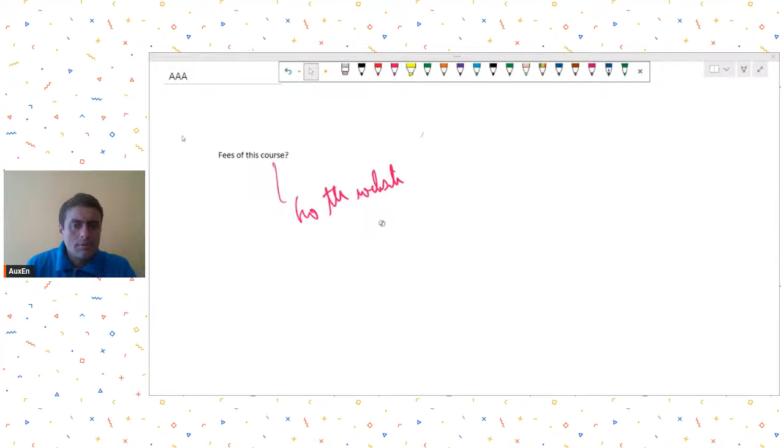Moving on, the next set of questions have been asked by Engineer Ishan Desai. He is a working professional from Goa, and he is asking these questions. I'll just put it up over here. And I think he had shared one image also on WhatsApp. Okay, he has put that in. So let me first take these queries.

What is the maximum span of a cantilever slab one can give for balcony in RCC? So there is no restriction as such on the span that you can go till. But then, if you could show the results of this case on ETABS or SAFE. No, so there has to be some specific case which I need to show you, so I'm not showing any case over here. But what is the maximum span? No restriction as such. It will depend on the system that you can come up with.

Okay. But if it's, let's say, a residential building, people will not be ready to do a lot of things for long span cantilevers. Otherwise, you may have to do some different structural system like Vierendeel girders or some 3D trusses. In residential commercial constructions, people won't be ready to invest so much on that. So I would say comfortably a maximum span of around 7 to 8 feet is more than enough in small residential commercial buildings.

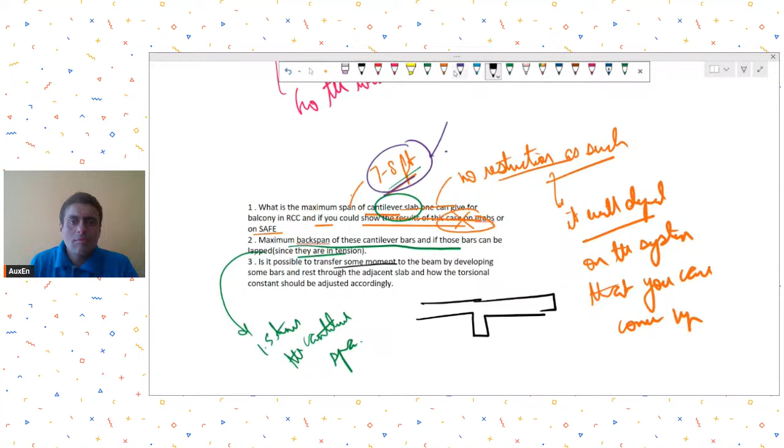Is it possible to transfer some moment to the beam by developing some bars and rest through the adjacent slab, and how is the torsional constant to be adjusted accordingly? No, just by developing bars, beams will not start taking moments. For example, I am showing you a cross sectional view; suppose this was a beam, and this was a slab.

And in plan view, this was something like this, let's say it is continuing over here. So in plan view, you had a beam at this location, and this was your cantilever slab, and this was your beam.

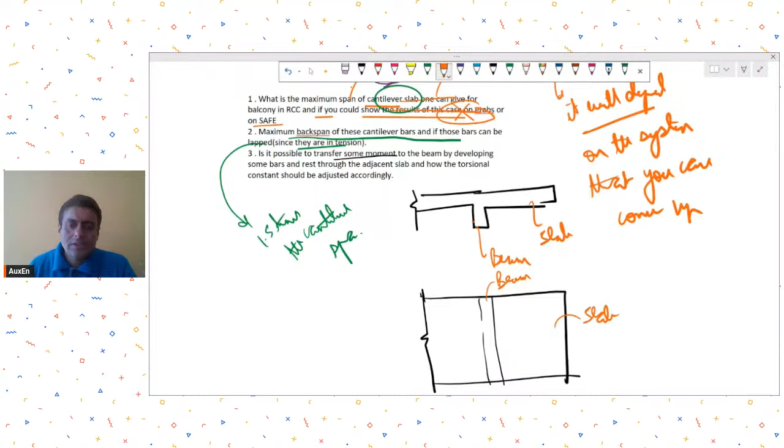So in this case also, this beam will have some torsion. That torsion will be to maintain the equilibrium. So there will be some torsion in the beam. Now just developing the bars and hoping that the loads will be relieved from the beam, it does not work

that way. It all depends on the stiffnesses, it all depends on the cantilever span, it depends on the torsional stiffness of this beam, it depends on the flexural stiffness of this slab. So just by developing bars, you cannot change the behavior. Please understand, the behavior depends on the rigidities and stiffnesses of these individual elements in the respective actions.

So torsional constant to be adjusted, I'm not sure what you mean by that, but please understand that developing bars carry no meaning. You have to understand the stiffnesses involved and how they are going to play out. Okay. Yes.

Okay, related question over here. Mr. Yogeshwar Rao is asking how to withstand 8-meter span cantilever beam without back anchoring. Why do you want a 8-meter cantilever beam? 8 meters is a lot. First of all, ask this question to yourself. And that too, you are saying without back anchoring.

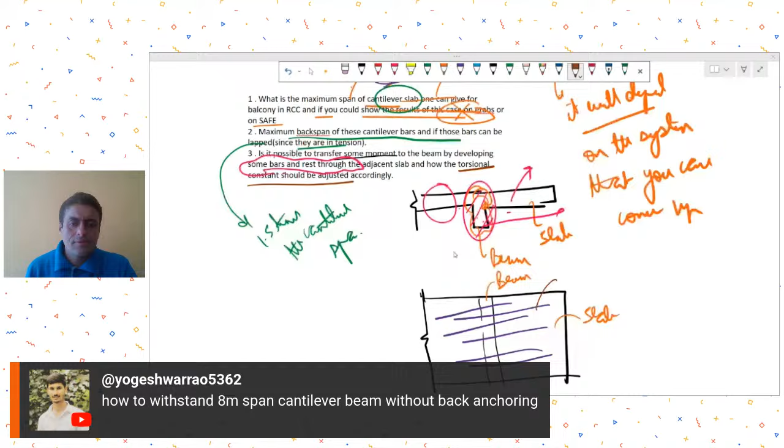So, in these cases, let's say if this was a column cross section and you are taking 8 meters out cantilever and it does not have any backspan. I am showing you a sectional view. So I don't see the reason. First of all, ask this reason to yourself, to the architect, why at all an 8-meter span is required.

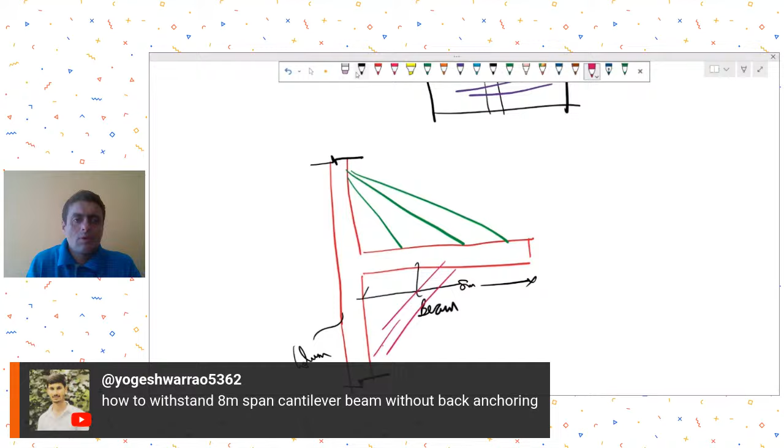If, let's say, usage wise it is required, just having a 8-meter span without backspan will not be stable enough. You will have to add other systems. For example, you may have to add wire ropes, or if possible, some knee braces, or you may have to develop some three-dimensional truss system where maybe another beam you take something like this, and then try to make something on this face in this view. So these types of systems will be required.

Just a normal beam 8 meters without backspan, you will not be able to stabilize it, and I will not recommend you to do that unless you add other systems like, as I just explained, some wire ropes or some knee braces, etc. Okay.

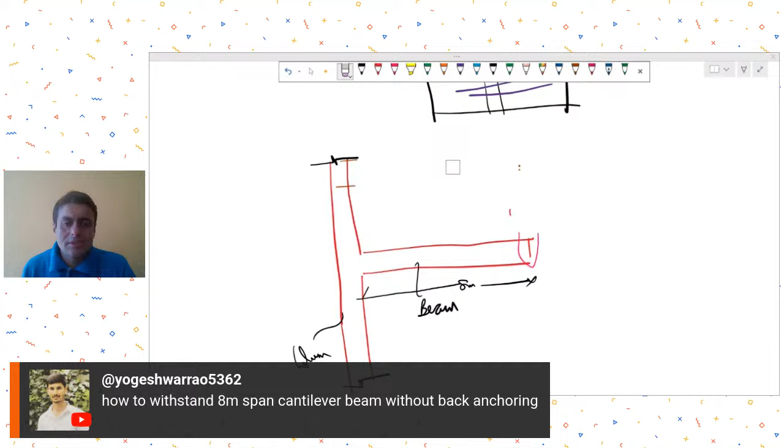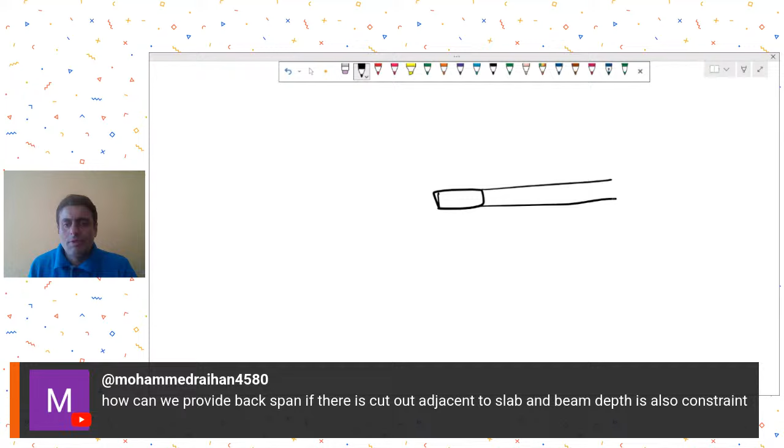Mr. Mohammed Raihan is asking a related question. How can we provide backspan if there is cutout adjacent to slab and beam depth is also constrained? Yeah, so see, these are specific problems. Then you will have to work your way around with your architect or with whoever is looking after the project. So if this was the beam, I'm showing you the plan view, and suppose this is all slab.

So specific cases you have to come up with specific solutions. An answer to every specific case may not be possible without knowing all the facts of the matter. But what I can understand is he's saying there is, let's say, a cutout over here in plan. So now you cannot have this beam continued at the back because there is a cutout. So in this case, what to do?

So it will depend, as I said, these are specific problems, specific doubts. These will require specific solutions as per your structural configuration, and then you can come up with solutions whether to shift this duct or maybe add another beam adjacent to this beam, whatever. So unless we have all the facts, specific doubts are difficult to answer. Okay.

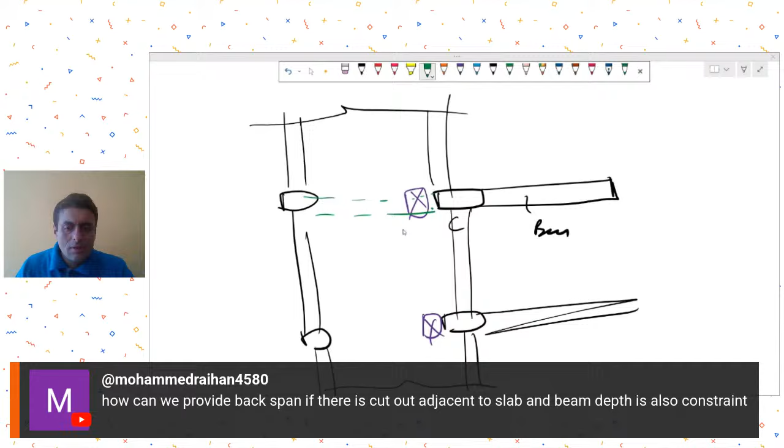Then the next query is from Mr. Ishan Desai, who has put another query. Let me just paste it over here and try to make sense of it. So he has put this query and then he has put this image, and I think he has shared one more image.

"The column forces are transferred as point loads in ETABS, and we try to convert it into shell forces by assigning stiff to those slab members around those points and the forces which we import to the SAFE file. But the stresses ultimately are being developed around those points in SAFE, which would not be a correct distribution of forces, I think."

I'm not sure what he wants to say, and whether it's a question or a query. So I'll skip this because I have not fully understood what he wants to ask. Then moving on, just a minute.

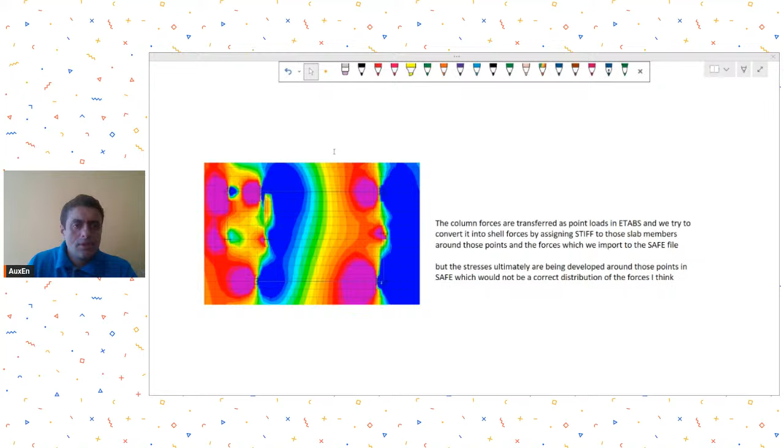Moving on to the next question. This query is from Engineer Rohit Dogra, who is from Himachal Pradesh and is a working professional. He is asking a query that many people have, and we've tried to explain this a couple of times earlier also.

He is asking: in my ETABS model, I have a structural wall and a column system resisting lateral loads together. I want to transfer about 25% of the total base shear to the column and the remaining 75% to the walls. This is the requirement given in ASCE 7-22 for dual systems.

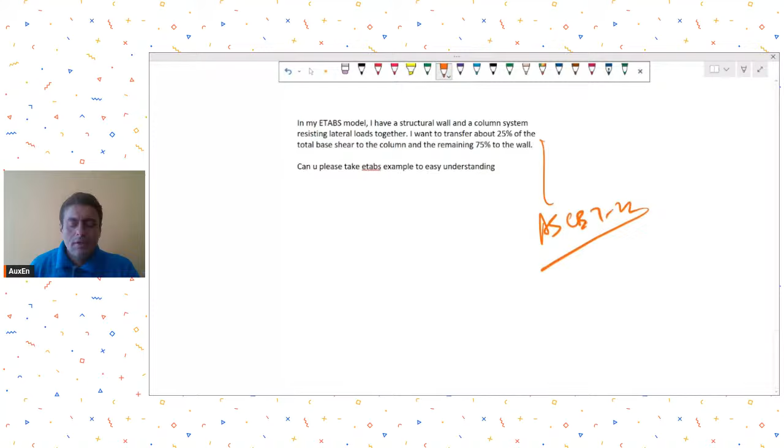In ASCE 7-22 for dual systems, if you go to chapter 12, they have given this requirement for the perimeter frame. So let's say if you are going for a dual system, which is special moment frame plus shear wall, the perimeter SMRF system has to take at least 25% of the total earthquake load. Understood?

That is the requirement given in the code—at least 25% of the total earthquake loads. I don't think the language says 25% of the base shear; it says 25% of the earthquake load. There's a difference between those two.

So let me just see first the language of ASCE 7. This requirement is also given in the IS 16700-2017 code, where they say something like this—25% criteria in well distributed shear wall systems. So how to go about this is the question asked. Let me just see what is the requirement given. Yeah, so it's not base shear.

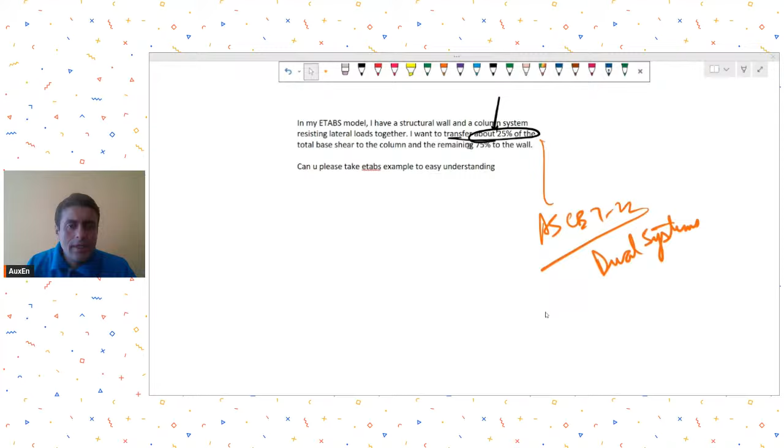Let's say I'm taking a screenshot from ASCE 7. It says: dual system with SMRFs capable of resisting at least 25% of prescribed seismic forces. There's a difference between resisting seismic forces and resisting base shears. So now how to go about it is the query.

Let me also have a look at the screenshot of this. Just a minute—screenshot from IS 16700, and then we shall discuss.

Anyone in the live audience who has this query as well, or anyone who does this as per their own way? Yes, please. Anyone who has had this query, or anyone who has been taking care of this provision through some procedure that they have developed? Just a minute, I'm just...

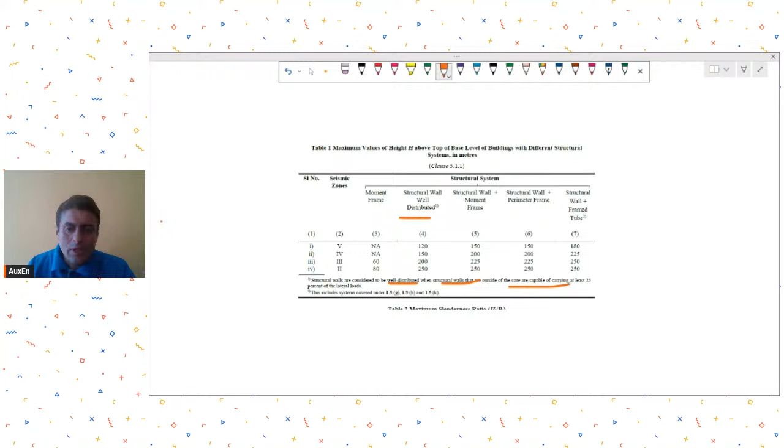This is a screenshot from IS 16700. It says structural walls well distributed—structural walls are considered to be well distributed when structural walls that are outside the core are capable of carrying at least 25% of the lateral loads. Again, it's not base shear, it is lateral loads. All right, so let us see how you can mathematically try and do this.

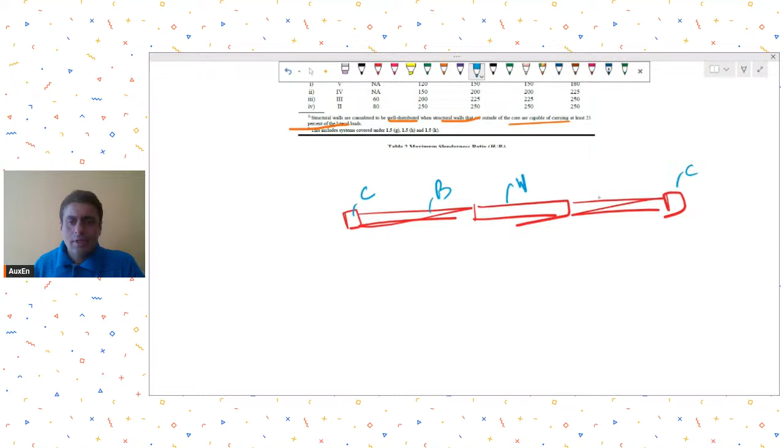I have explained this many times before also, let me try to explain once again. Suppose I had a simple frame—this was my wall, I'm showing you the plan view. This is my wall, these are columns, and this is my beam. In elevation, it looks something like this: this is my column, then I will have a beam, then this is my RCC wall, again beam.

Now what you need to understand is that there is some lateral force acting. This lateral force will have two effects. One will be that it will cause some shears—let's say this is V1, V2, V3. So first just see, and this is easier to see, that you just sum up the shears and try to get a sense of what is happening.

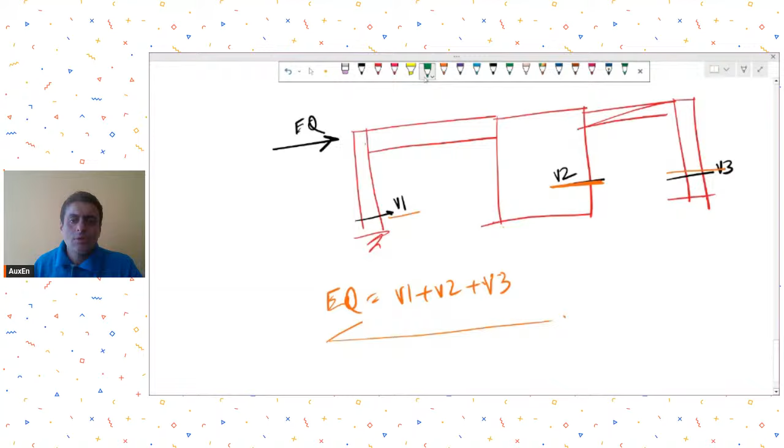If you do this, you will find that the total summation of shear forces developed will be equal to your external force. Now if I were to ask you how much shear the wall is taking, what percentage, and what percentage column C1 is taking, how would you find it out? It's quite easy: the percentage of shear the wall is resisting will be equal to V2 upon V1 plus V2 plus V3, or V2 upon the total lateral force. This gives you the percentage of shear resisted by walls.

Now this does depend on the stiffness. So you will see in such cases that the walls will be taking the maximum shears. Columns will not be taking shears as high as the wall, because it depends all on the stiffnesses. Understood? But there is one more effect of the EQ force, and that will be the overturning moments.

Now, how are the overturning moments resisted? Understand that the overturning moment will be resisted by, let's say, development of some moments, something like this.

Plus, there will be axial tension compression couples also. So let's say here there is some axial tension compression couple, and it is compressive in this region. This distance is x1, this distance is x2, and this height is h.

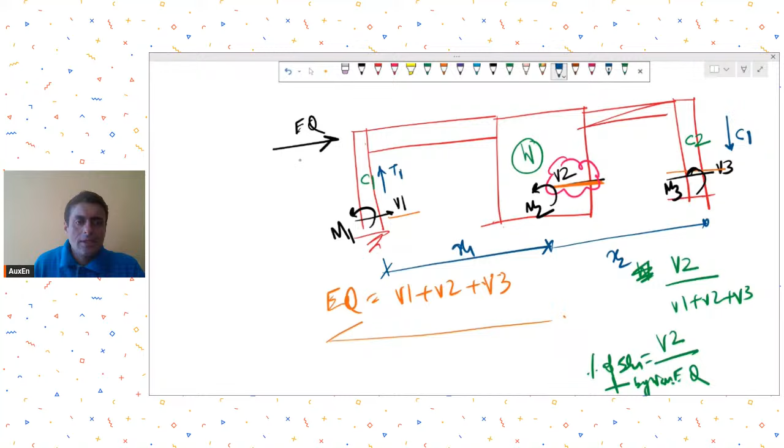So now how will the overturning moment be taken? You will say EQ into H. This is the overturning moment developed.

This will be equal to M1 plus M2 plus M3 plus T1 into X1 plus X2. Or instead of T1 into X1 plus X2, you can also write C1 into X1 plus X2, because T1 and C1 will be numerically equal.

Is this clear? So now if I were to ask you what percentage of overturning moment is being resisted by wall W, what will you say? You will say that the percentage of moment resisted by wall W is M2 upon EQ into H.

Or if I were to ask you what percentage of moment these two columns are resisting, then you would say the percentage of moment these two columns are resisting is M1 plus M3 plus T1 into X1 plus X2, divided by the total overturning moment.

So this will be the percentage of moment resisted by columns. This will be the percentage of moment resisted by the walls.

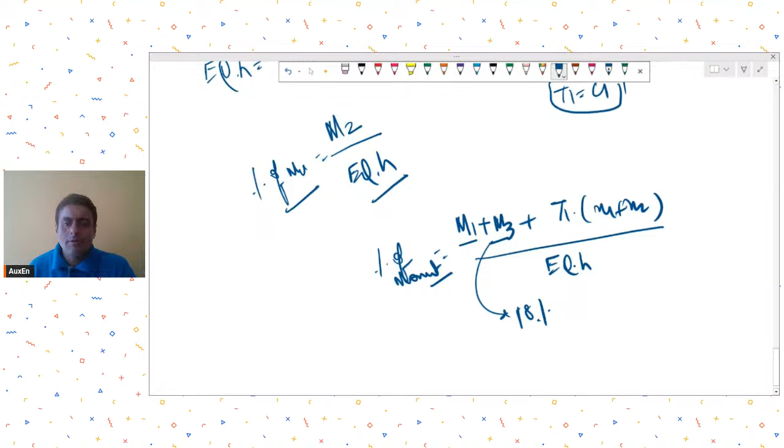Suppose you did the calculation, and just for example this came out to be 18%. How? Because you just summed up these moments, you did this divided by the total moment. So it is coming out to be 18%.

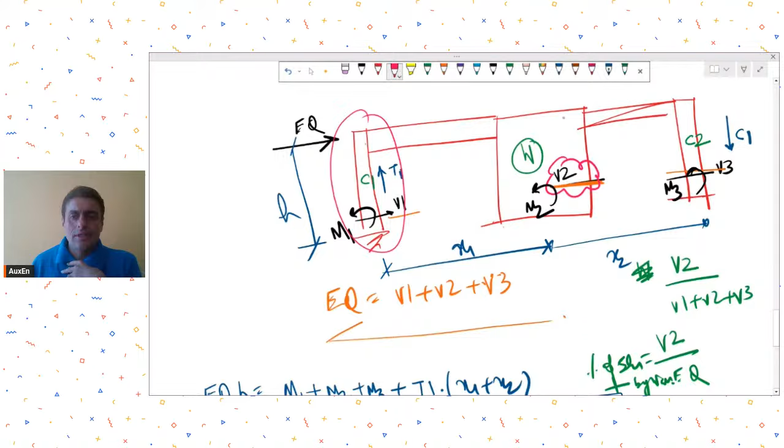Now, as per your clause, in this case the well-distributed structural walls have to take 25%. In dual systems, the moment frame has to take 25%. Just take whatever - in this case, let's say the columns were part of a dual system. They needed to take 25%. And right now they are taking 18%.

So now how to ensure that they are able to take 25%? That is the question. Anyone with any thoughts over here?

Is this clear what I just said? This is the way you find out the percentage, approximate percentage of moment getting resisted. Because you must understand that earthquake forces or lateral forces will have two outcomes - one will be the shears that they create, and one will be the overturning moment.

Shears, it's very easy - shears mostly depend on the cross sectional area and stiffness, so that will not give you the correct picture. So it is always better to find out the overturning moment in this way, and then try and see what percentage are being taken by whom.

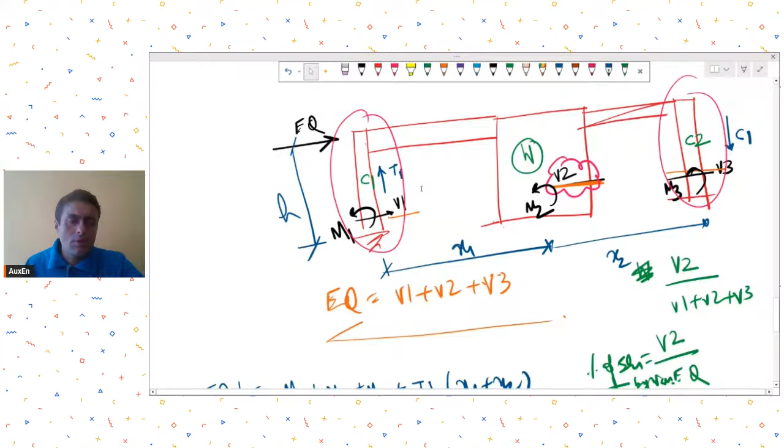Now let's say if they were taking around 18%, you wanted to have around 25%. So a quick jugaad way of doing this can be - some people suggest to apply modifiers. You save your model under a new name, and then apply modifiers in such a manner that the moments flowing to the columns increase from 18 to 25. That can be one way, but then it means you need to apply modifiers and do all those things.

So instead of that, a simpler way can be that you just define a new load case in ETABS. Let's call it EQ1. Define a new load case, let's call it EQ1. And in EQ1, how do you define it?

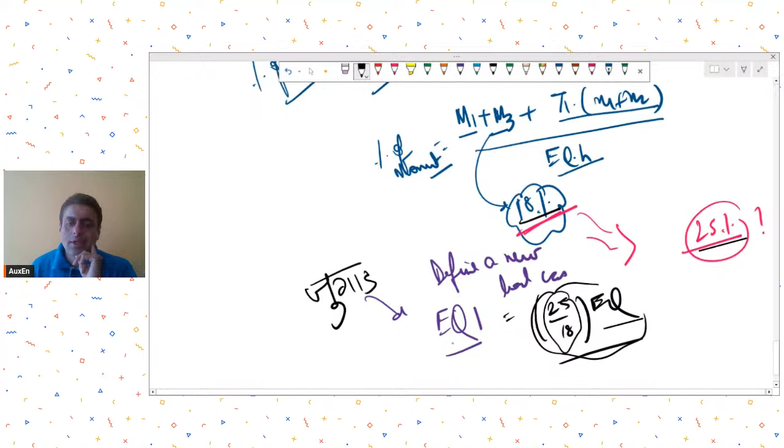So approximately 25 upon 18 times of EQ. Understood? So for your original EQ force, it was taking 18%. You want your system to be designed for, let's say, 25% for the columns alone. So you can use this as a multiplier, multiply it to EQ, create a new load case, and then use this load case in load combinations for design of the columns and beams, or the moment frame.

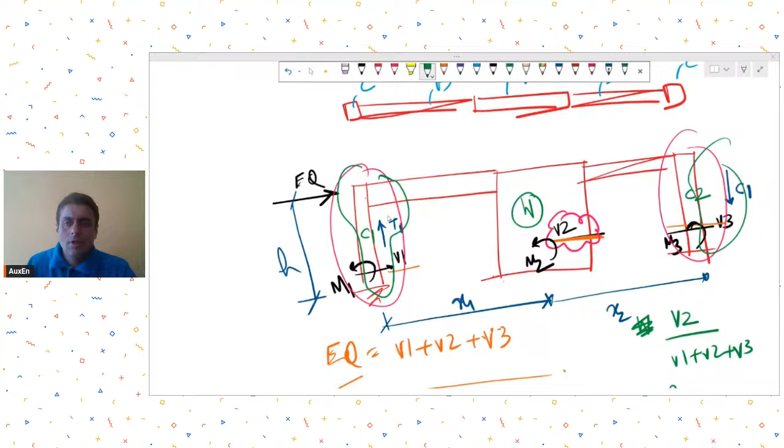So this case I took assuming that the external columns had to take 25%. You may have a case where the well distributed shear wall has to take 25%. Whatever is your criteria, in a similar manner you can do a quick jugaad. Is this clear? So this is one of the easier ways to handle this 25% criteria for dual systems or for well distributed shear walls.

So you find out the percentage and see approximately how much percentage is being resisted. Then introduce a new load case with this factor multiplied to your original lateral loads. You can use those load combinations only for the 25% criteria, for members which need to satisfy the 25% criteria, and design it accordingly. This can be one of the ways to do it.

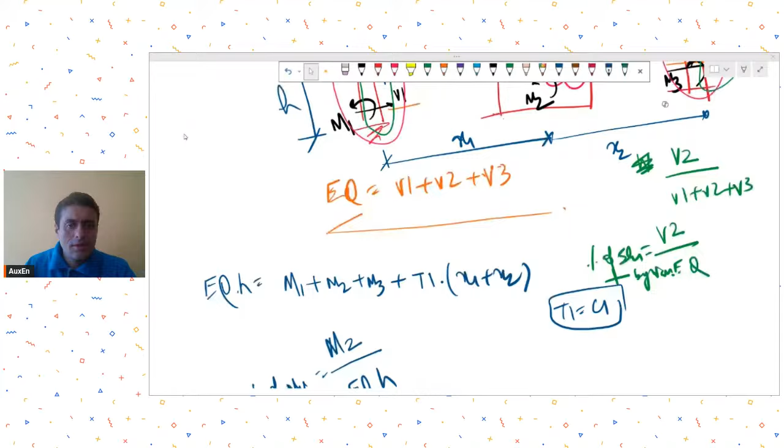Let us take the next query. It is from Dr. Harish BA, who is a participant in our liquid retaining structures course. Let me explain what he's asking very quickly.

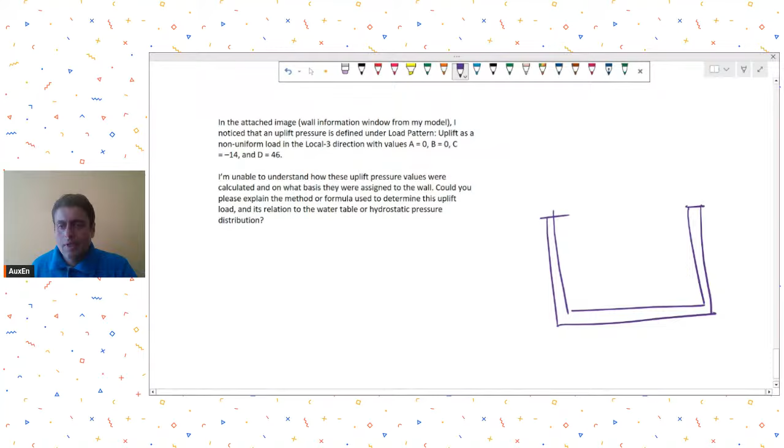Let's say this is a water tank sectional view and it is underground, and this is the NGL, ground level. There is presence of water, and let's say the water table is still here. There is water inside the tank since it's a water tank, and presence of water table outside. So now what will happen due to this water table?

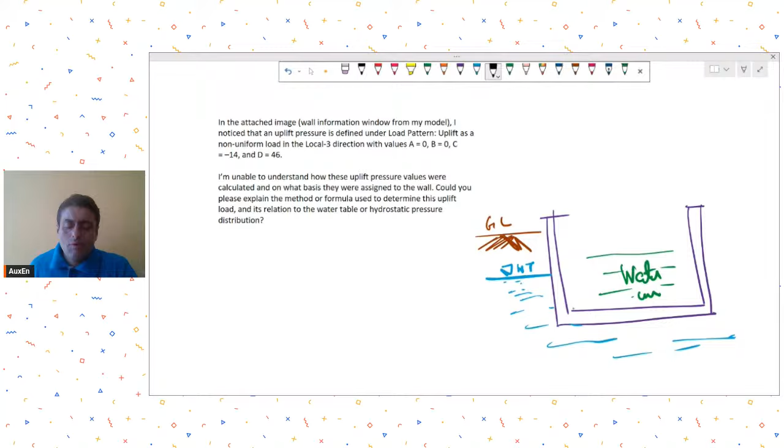This will first create an uplift on the raft. How will you calculate this uplift? Let's say the depth of the tank was 5 meters from the ground level, and the water table has risen up to 3 meters from the base. So what will be the uplift pressure acting on the tank? Naturally, uplift will equal gamma W into, as per the rules of buoyancy, 3 meters. This will act on the bottom of the tank or base of the raft.

Then, because of this water table present here, this portion of the soil is saturated, so there will also be lateral pressures due to this saturated or submerged soil. How do you do that calculation? As I had explained, the submerged soil condition exists below the water table. So up to this distance, you apply a triangular pressure due to soil. Let's say this is 2 meters, so this will be Ka gamma soil into 2 meters. Now below this, what will happen?

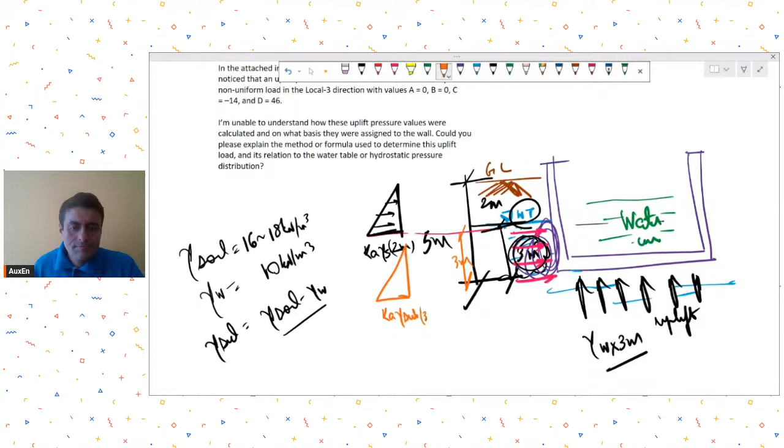This soil is submerged. Let's say gamma soil is around 16 to 18 kilonewton per meter cube density, and gamma water is around 10 kilonewton per meter cube. So gamma submerged is usually gamma soil minus gamma water. So how will we apply pressures over here? One component will be the submerged soil, which is Ka gamma submerged into this depth. To this you add the presence of water, which is gamma W into 3 meters. In this manner you can apply the loads.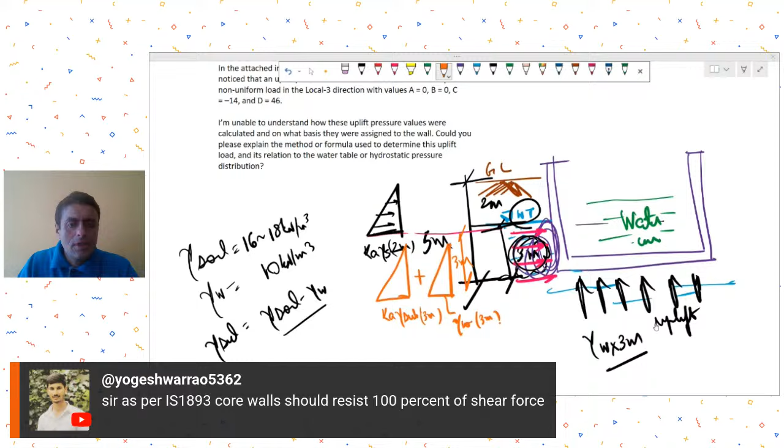Is this clear? So this was Dr. Harish BA's query. I think in an earlier question, a related query was, as per IS 1893, core walls should resist 100% of shear force. I am talking about dual systems -- what I explained in this was dual systems.

For dual systems, just have a look at ASCE 7-22 chapter 12, or have a look at IS 16700. Good. After this query, let's move ahead and see what else has been asked.

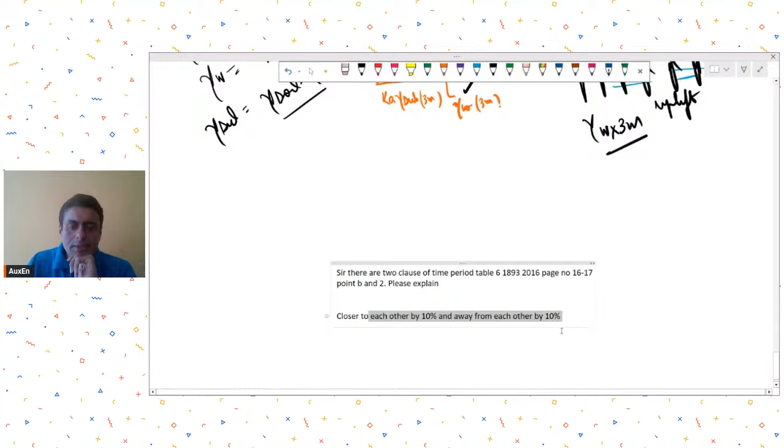Mr. Rohit Dogra is asking about two clauses for time period, page number 16, 17, point B, and the clause about time periods being closer to each other by 10% versus away from each other. Mr. Rohit, just refer to the Ask Us Anything session we conducted last week, or the week before. I'll share the link with you -- this same query has been explained there, so just go to that episode and have a look.

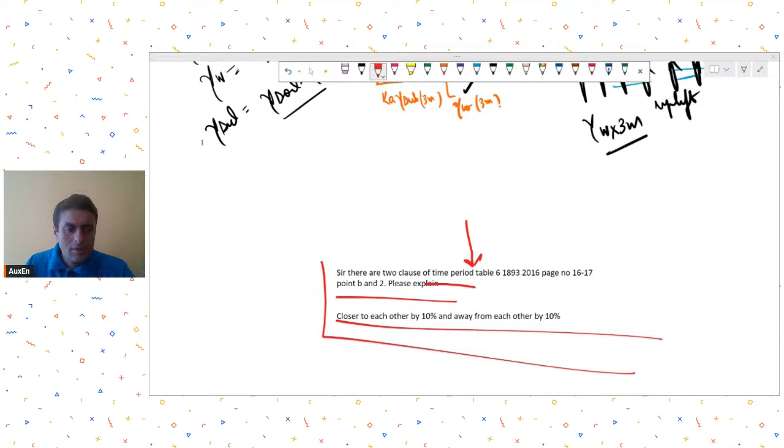Moving ahead, Engineer Abhijit Sathe is asking -- he is a working professional from Pune. What is the effect of column shortening, he is asking.

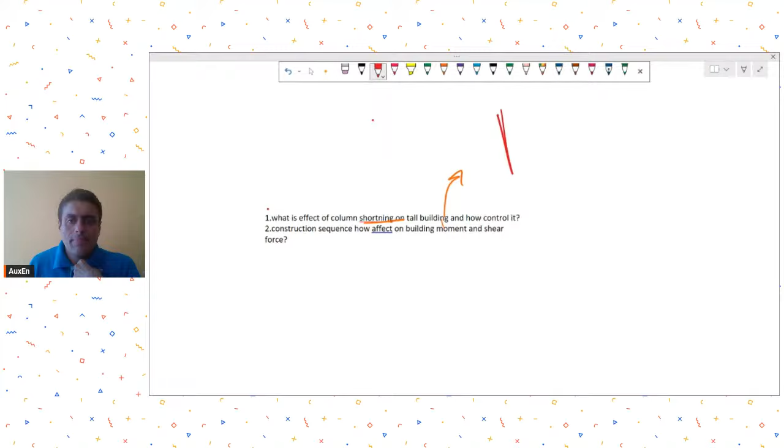See, columns, because they are axial members, and any axial member subjected to load will develop a strain. Any axial load naturally will create P by A stress, and if you divide it by E, it will naturally create strains, and any compressive strain will create shortening. That is natural -- you cannot control it, you cannot not have axial shortening. Understood?

It's not possible to not have axial shortening. It will always be there, because it's a property of the material to expand or contract when acted upon by loads. And it's not a rigid material. Please remember, both concrete and steel don't have infinite rigidity. So if they have a certain modulus of elasticity, there will be strains. Because of those strains, there will be shortening or elongation. So you cannot not have them, but yes, you can control it.

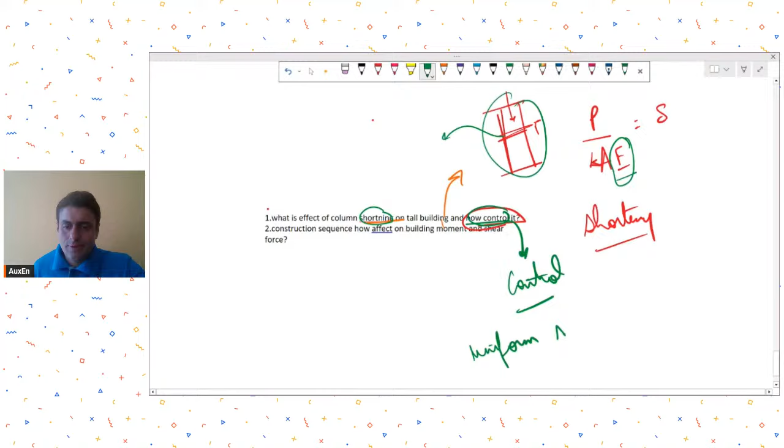By controlling it means, as far as possible, we generally try to have uniform shortenings. Okay. So uniform shortening means, let's say you have your tall building. Why we are talking more about this problem in tall buildings is because tall buildings will have large column axial loads which you may not get in normal buildings. And when there are large axial loads, you may get significant axial shortenings.

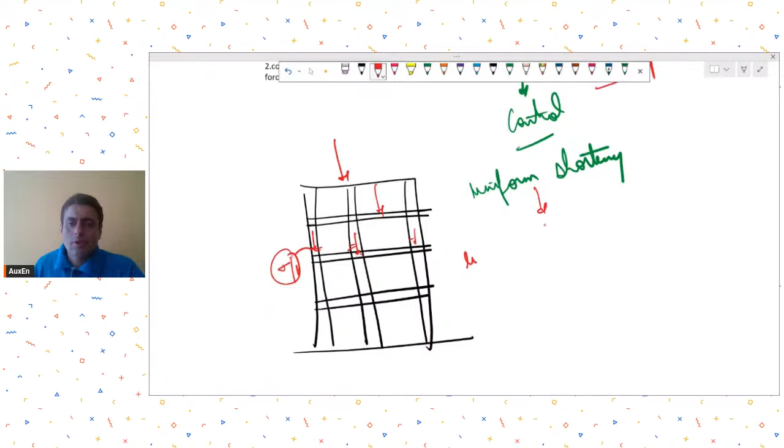Okay, so as long as the stresses developed in these columns are more or less uniform, the shortening will also be uniform. Understood? So uniform shortening is not a problem. Uniform shortening is not a problem. All right. When does it become a problem? When the axial shortening is non-uniform. What does non-uniform mean?

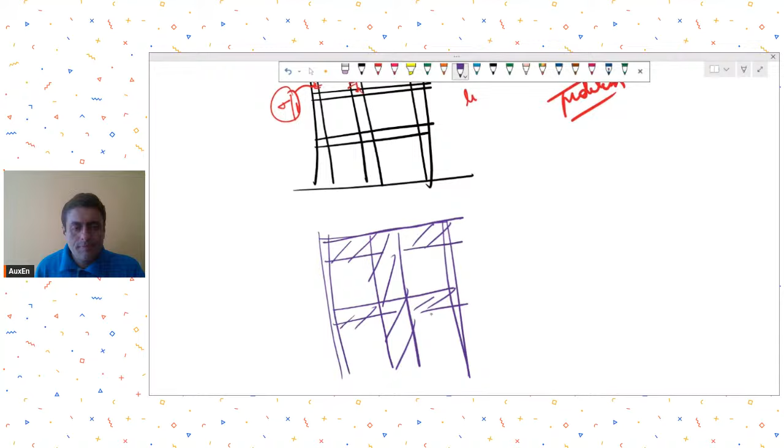Suppose I have this type of structure. Just to give you an example, let's say I have a central core, and I have connected it by outriggers. Okay. Now, because of these outrigger systems, most of the load is flowing to the periphery, so there is a large variation in the axial stresses in this element and in this element. So this was a central core, these were my outriggers. In this case, there will be large axial shortenings in these columns. The central core may not have such high shortenings.

So now, because of the differential shortenings, there can be a problem. So what does it cause? Because of this axial shortening, there will be non-uniform settlements, and because of those non-uniform settlements, you will get large moments in these elements, which you then have to design. So axial shortening, when it becomes differential or non-uniform, becomes a problem. Then you will have to control it, either by making adjustments in your configuration, or by designing it considering that.

Or some people postpone this construction to a later stage. So let's say they will have these columns and these cores, and at a later stage they will go for the construction of the outriggers. Or in some cases, they try to have some allowance or provision to accommodate the differential settlements in these outriggers. So some adjustments like these are then made.

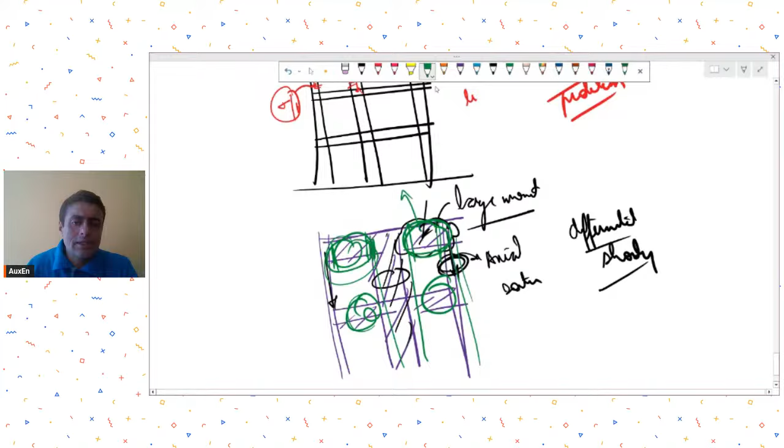Construction sequence, how does it affect our bending moment and shear forces? This has been discussed in detail in our tall buildings course. I will suggest you have a look at how construction sequence affects it. Basically, with construction sequence, because your stiffnesses change, your moment distribution changes. So with the change in stiffness, the force distribution also changes, and that is taken care of in the construction sequence analysis, which becomes important for taller buildings.

Not for your 7 or 8 story buildings; there it does not become important. It becomes important for your taller buildings. So in our tall buildings course, we have discussed this issue in detail. You can have a look at that course.

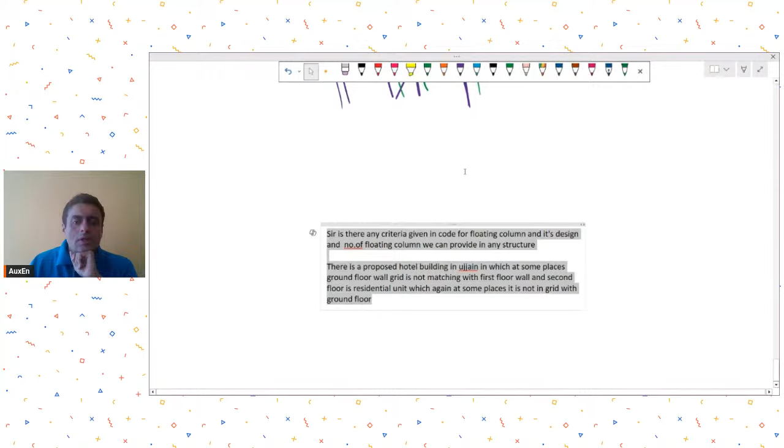Okay. The next question is from Mr. Pratish Avasthi. He is a working professional from Indore, and he is asking: is there any criteria given in the code for floating columns and their design, and the number of floating columns we can provide? No, no such criteria is given. You can provide any number of floating columns as you wish.

The only thing the code says is that if you have floating columns, those frames which have floating columns cannot be part of your lateral load resisting system. Only this the code says. Otherwise, the code does not have any additional guideline or criteria on floating columns.

So he is elaborating: there is a proposed hotel building in Ujjain in which at some places ground floor wall grids are not matching with the first floor wall, and the second floor is a residential unit. Okay, so you may introduce floating columns. Just remember that the frames which have floating columns cannot be part of lateral load resisting systems.

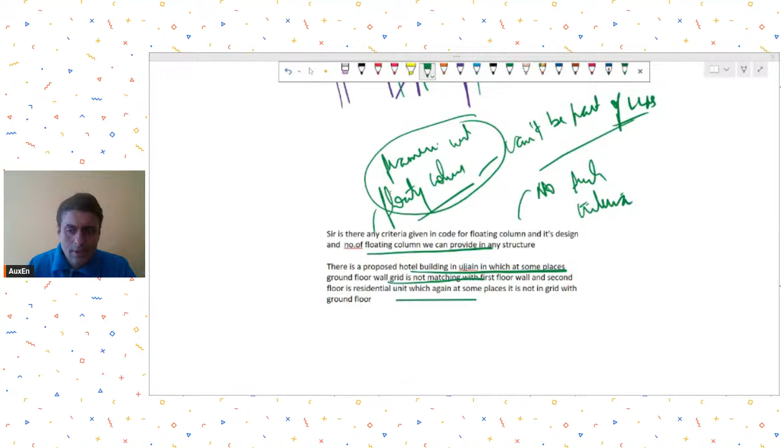Good. The next query is from engineer Akash Babar. He is a working professional from Mumbai, and he is asking what should be the effective length factor for shear walls.

Yeah, it shall be same as your columns. So the procedure remains the same. Okay. Effective length factor calculation procedure remains the same as you do for columns. Okay. There is a related query that has been asked by engineer Shaik Jawad.

In design overwrites for beams, we have ordinary, ductile, and non-sway. What is the difference between ordinary and non-sway design overwrites? See, for beams, it does not make much of a difference. For beams, the only difference will be if you are using ductile, then it will follow the rules of ductile design detailing, IS 13920. If you are using ordinary, it will follow the rules of normal IS 456.

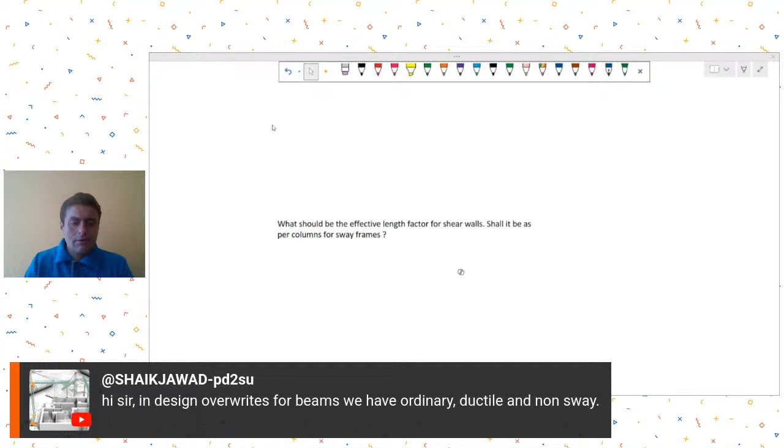For columns, it does make a difference whether you are using ordinary, ductile, or non-sway. So it does make a difference, and this point has been very well explained in one of our earlier YouTube live sessions. So what I will suggest is that you can go to our YouTube live session on project discussion series episode 1. Okay, you will find that on our YouTube channel.

So go to project discussion series episode 1, and I think go to 26:51, 26 minutes 51 seconds in that video. You will find good explanation on ordinary, ductile, non-sway columns and what are the different settings for them and how it impacts the design. Okay, yeah, so just go over there.

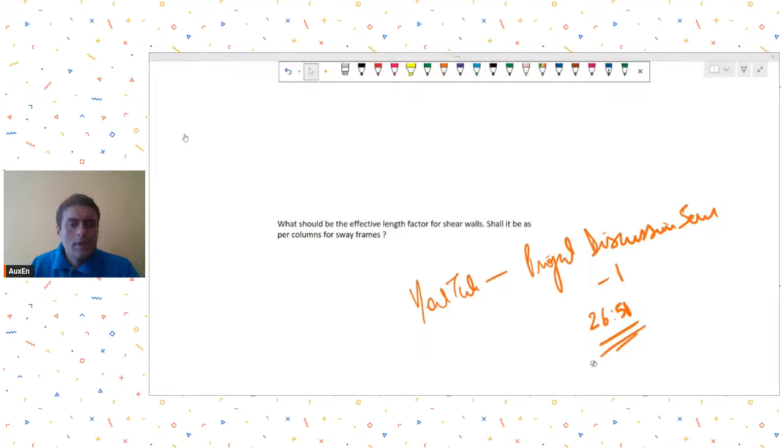Okay, then taking on the next query. Next query is from engineer Sundaraman from Hyderabad. He's a working professional. He is designing a PEB shed in STAAD with a Proflex sheet, 10-meter height, 20-meter width, 40-meter length. Should the effective length of column be taken as this, assuming it has to be cantilever column? Yeah, you should take it.

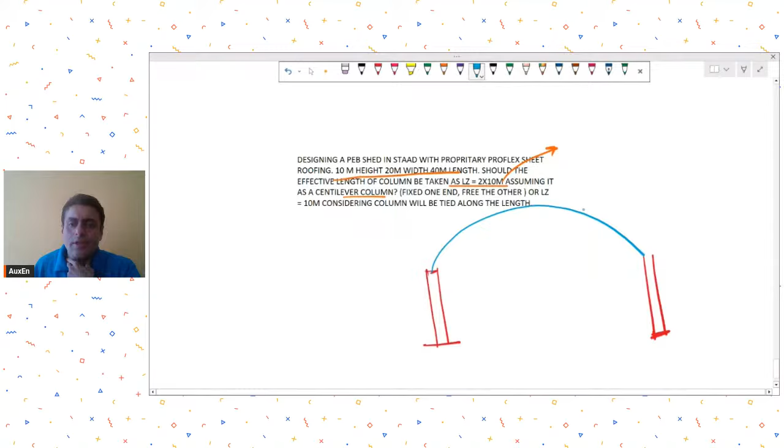See, ideally you should. What he is asking is that he has a system which is something like this, and then there is a roof sheeting, self-standing roof sheets. So in these types of systems, they are self-standing. That means they do not require any rafter or anything. This arch itself is self-standing. So he is using this type of a system. So this is 20 meters. He is saying this is 10 meters height, eaves height.

So now see what happens, these columns essentially become like freestanding cantilevers because they don't have any translational restraint in this direction. You may have a beam placed, but that beam is along the length. So along the width, you don't have any translational restraint. So this more or less acts like a freestanding cantilever.

So in this case, he is asking whether the effective length should be taken as, in cantilevers we take it two times the length. So should we take the effective length as 20 meters? That is 2 into 10. That is what his question is. So yes, I agree. You should do it this way.

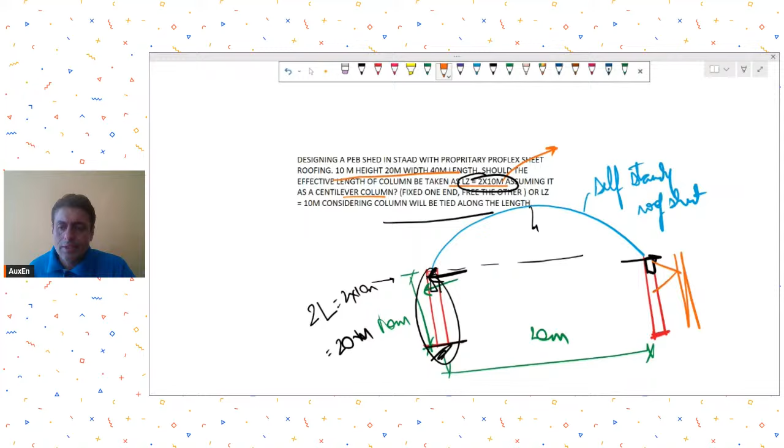Yes. And my suggestion in this case will be to go for some built up columns, PEB type. If you use plate sections, you may not get the best solution. Try to go for built up columns, lacing, batten, so that you can achieve economy. Or even better, if you can go with RCC column beams. Okay. Yeah.

And another point on this, this system will not be cost effective if you don't have good soil strata, because there will be large moments that your footing foundation system has to take. So if you do not have good strata, this system will not be cost effective. So just have a relook. People think that this is a cheaper system, but actually what you save on the Proflex sheeting or roofing, you end up spending in the superstructure and substructure. Okay. So this was his query. Moving ahead.

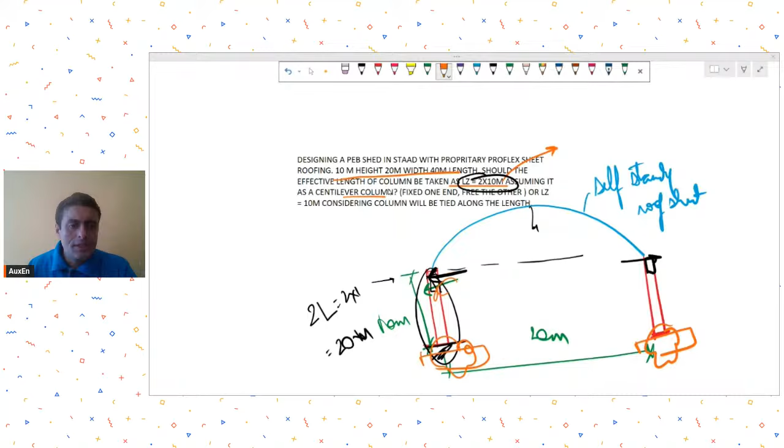Mr. Nikunj Pandarikar from Latur is asking how to model a steel staircase connecting a footover bridge in STAAD. Can you give me some advice here? He has shared one image also. Let me see what he has shared. Piers are already cast, he says.

No, so what advice do you want? I didn't understand this question. You have the plan, you have the section, make a staircase. If you want to learn modeling on STAAD, you can watch some YouTube videos. What advice do you need? You already have the details with you.

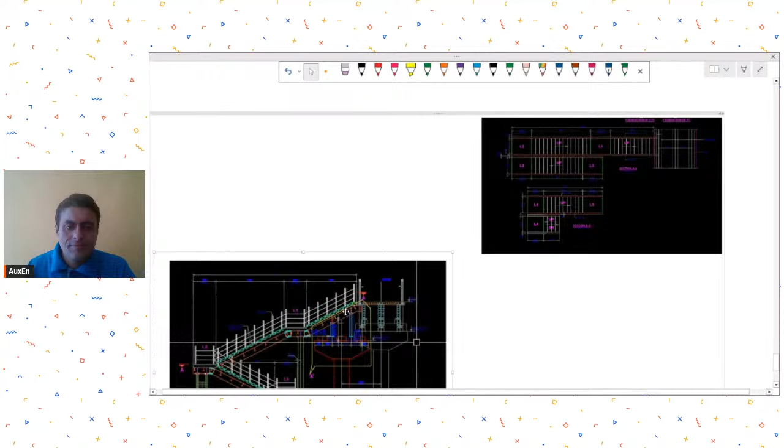So yes, this is his section. This is his plan view. You have the column positions. Everything is there. What advice do you need?

Okay, if you are watching this live, may reply.

All right. So I'm not sure about what advice he needs. Which method will be suitable means you go with a line modeling. Line modeling for staircase. Just use simple line modeling technique and just make one flight. So if all your flights are same, or if they're different, let's say you can take this flight if you wish, and just make a line model like this.

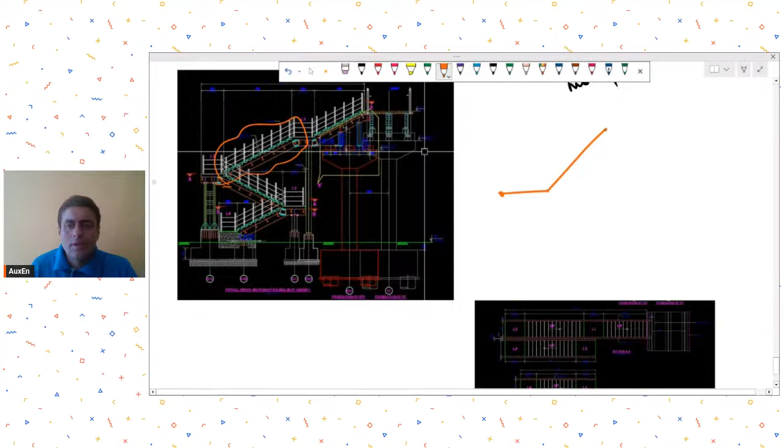Okay, it's not even necessary to make both the flights and treads and everything. Just make one line diagram, make one line model, and take the loads that will be transferred on this, and design your single line model like this.

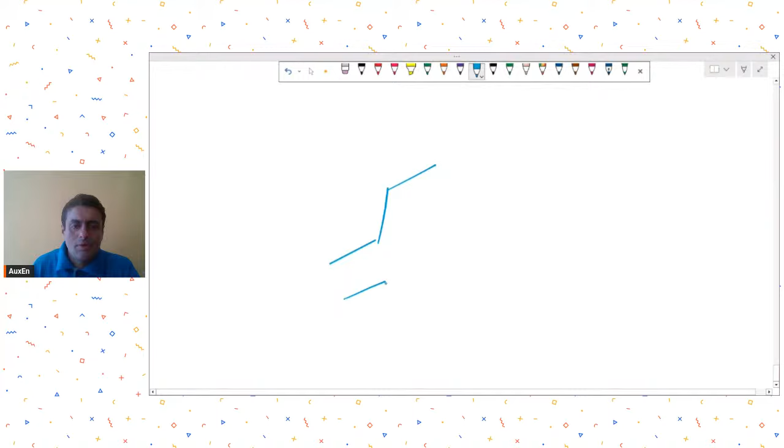If you want to make a complete thing, then you will have to take all these columns till respective heights, and then make all proper line diagrams, line models, whatever. So then in 3D view, maybe you will have to make like this, and then have these columns till whatever height they are having. Okay, then maybe from here it rises up to the next level, and columns, so whatever. So then you may have to make a complete system.

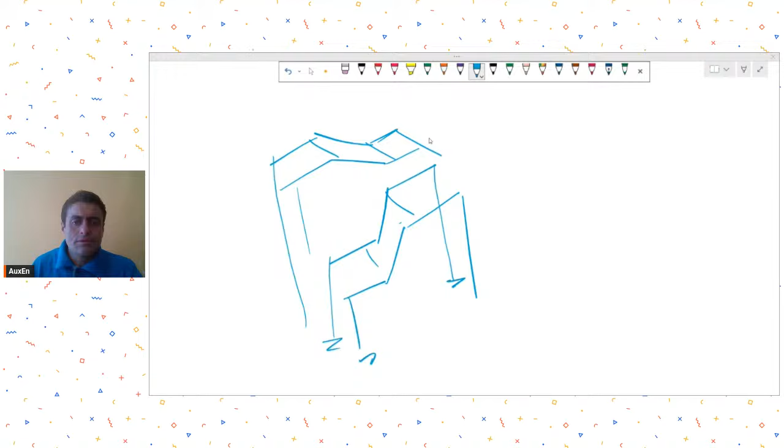But usually for these cases, ISMC 175 to ISMC 200 shall be good enough. So try those members for your staircase beams. Okay. Use a channel. Channels are easy because your staircase treads can be easily connected on the channel members. So try using ISMC channels and make your line models like this.

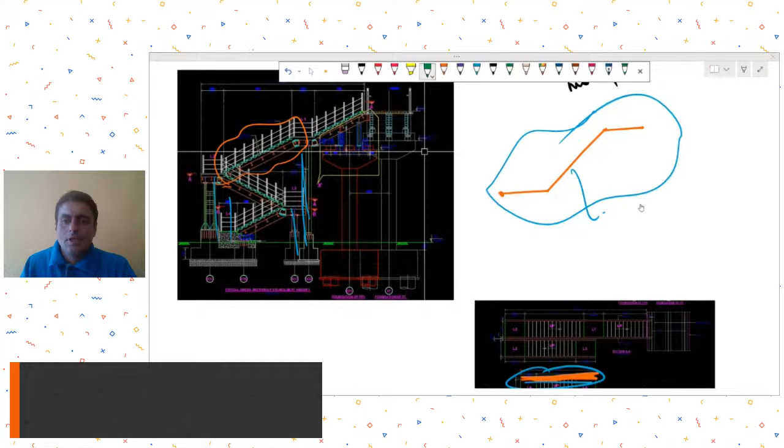Okay. So this was Engineer Nikunj, and so these were all the queries that were asked on the Google form. So now we can take up queries from the live chat. So Engineer Sourabh Shrivastav is asking, good morning, I have joined. Yeah, so he has joined this course on AISC steel design. He had a doubt regarding the M-phi curve, MjRd value.

Okay, so MjRd value is generally used for calculation of the connection stiffness. So for example, if this is your M-phi curve, moment rotation curve of your connection, MjRd is the joint resistance. So his question is, MjRd value is calculated based on member capacity or based on external force? No, so MjRd is the joint resistance.

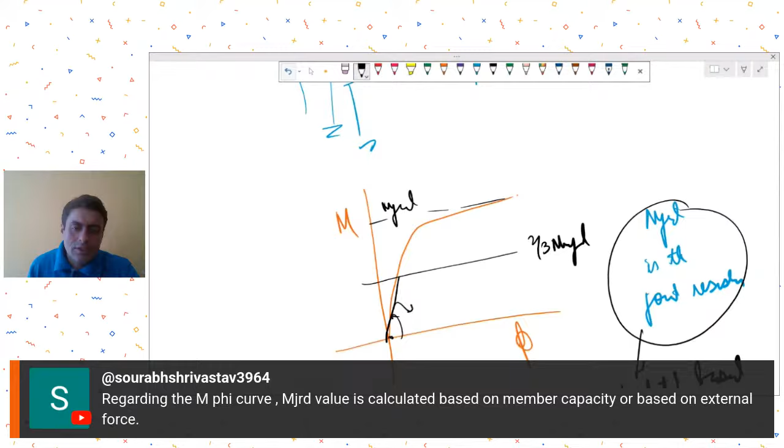So it is calculated based on the connection that you have provided. Actually, it is connection. So based on the connection, what bolts or what welding, what stiffener, what gussets, depending on that, MjRd is calculated by the software, and then at two-thirds of MjRd, this line cutting the M-phi curve at two-thirds of MjRd, the stiffness of your connection is given by the slope of this line.

Okay, so slope of this line means basically it will be the moment at two-thirds MjRd divided by the rotation at this level phi. So this gives you the connection stiffness, and then this connection stiffness you compare with the codal values to ascertain whether your connection is rigid or pinned or in between, semi-rigid, that is. Okay.

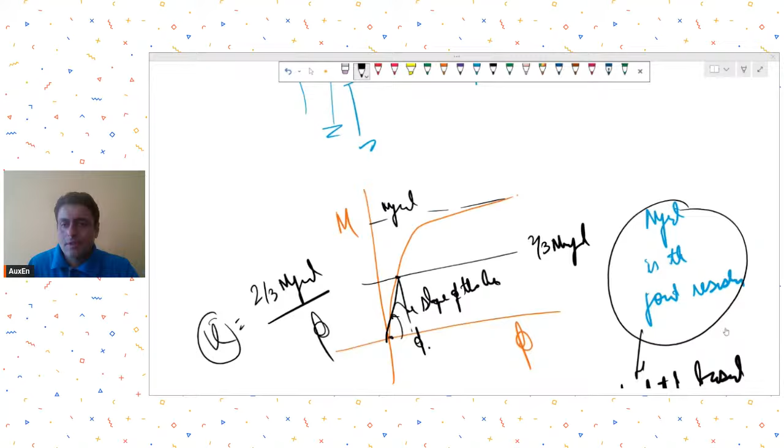So Engineer Sheikh Jawad's questions we have answered. Engineer Mr. Magaj is asking how to apply tuned mass dampers in ETABS. Please provide some reference. I don't have any knowledge about it. Neither do I have any knowledge of the appropriate references. I've never done tuned mass dampers. Anyone in the live audience who has some reference? No, I guess. All right.

So then the next query is from Engineer Tamilarasan. Give reference books for design of purlin with cold-formed Z shape with lip section as per IS code. Again, I don't have any reference. I don't know of any books. So anyone in the live audience, what should I say, if they have any reference that they know of, kindly help.

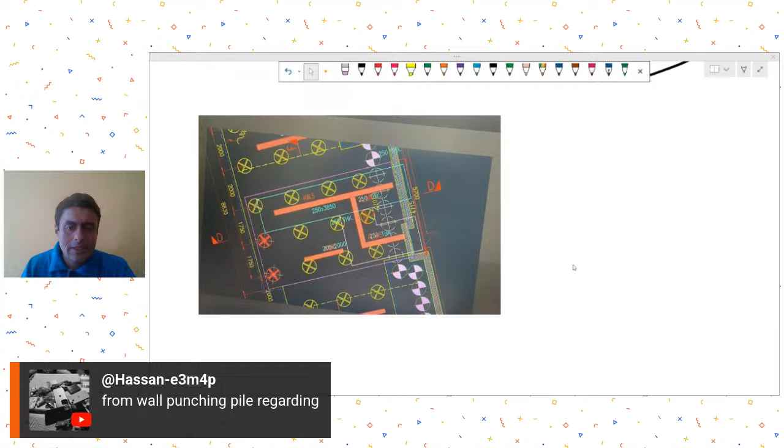So in this case, let's say this is the plan view as I understand, and this is his wall. So his query is that this is his wall, shear wall or core wall, whatever, and then it is resting on a pile cap, and those pile caps are resting on these piles. So in this case, he is asking how to check for punching.

So see, because of the shape, wall punching is not a big problem, because of the geometry that you have. Wall punching may not be a problem. Wall one-way shear is a problem, and also you will not get these results from the software. So you try to check for the

one-way shears, and one-way shear in the wall will be concentrated in these regions quite naturally, near the wall face. So try and see these one-way shear values. Okay. So you may look at the V13, V23 stresses, or directly you can go for shear stresses output in ETABS and try to see that they are less than the concrete capacity.

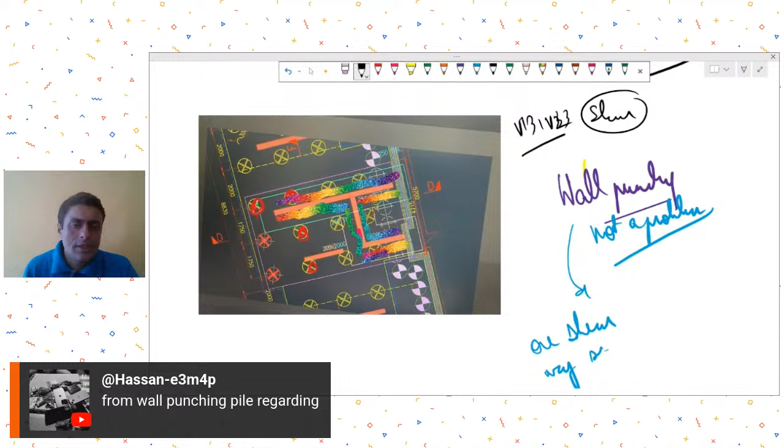And when it comes to pile punching, yes, in the case of pile, you will have to check both the one-way shear and two-way shear, and pile can punch through the pile cap, so that has to be checked. Now in this case of pile, the code says that you need to check even the one-way shear at d/2 distance away from the face of pile, not at d distance. For pile checks, the code asks you to check it at d/2 distance, so you do that check also.

Okay. And check for the two-way punching or two-way shear as well. So for the wall in this case, only one-way shear check is good enough. For piles, you check it at the d/2 distance from the face of pile. All right. Is it clear? Okay.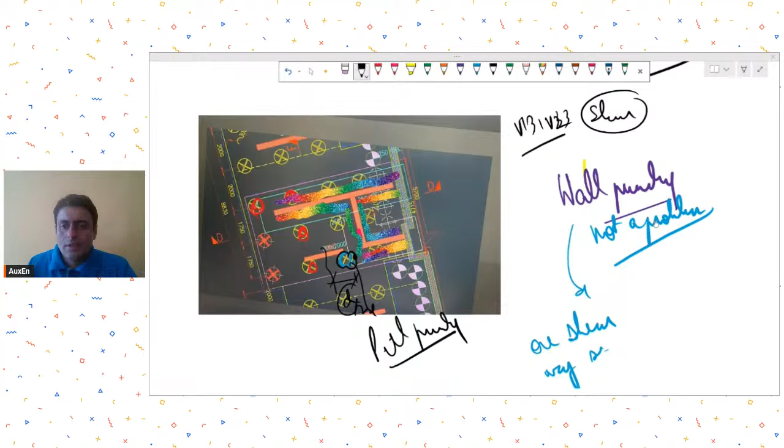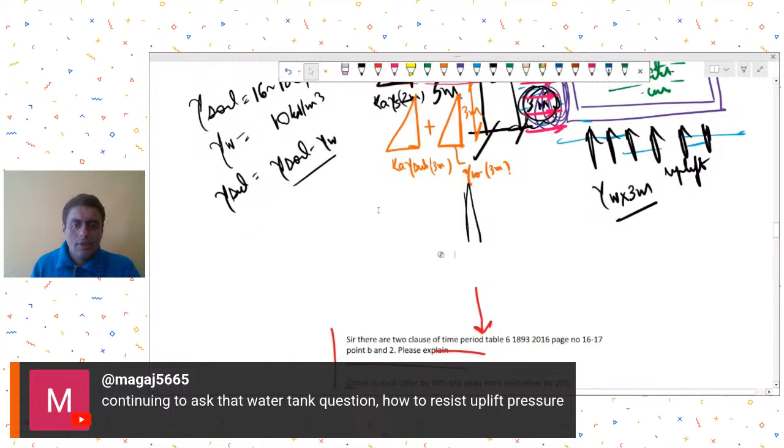Then, okay, Mr. Magaj is continuing to ask that water tank question, how to resist uplift pressure. So, resisting uplift pressure, you may use different strategies. One of the strategies is to take out these types of extensions in the raft of your water tank, something like this. And let's say this is your ground level. Because you have taken these extensions, the soil will help you to counterbalance the uplift.

Okay, so you may do this calculation, what is the weight of soil, and then see what is the uplift created by this water. Now see, in underground tanks, if your tank is full, then uplift is not a problem because water is inside. Generally it will add a lot of weight. Problems may be in case of tank empty and water table outside. So in rainy season, let's say you had water table rising up to some height and tank was empty, then uplift can be a problem.

So try to counter the uplift by adding soil. And how to add the soil? By taking these extensions. If even that is not sufficient, then you may have to think of providing some underpinning arrangement. In soft soils, you may try to incorporate some piles, underream piles or friction piles. If your underground tank is resting on hard strata, you may go for some reinforcement underpinning or reinforcement connection to the strata below. So these can be some of the strategies to resist the uplift water pressure.

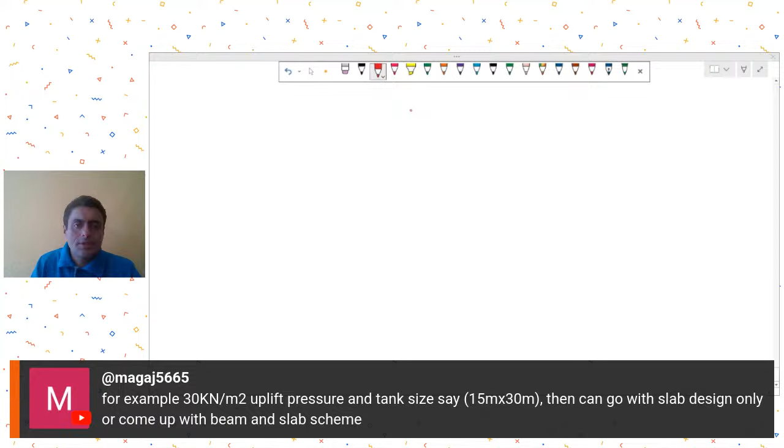Oh, Mr. Magaj is having a query. For example, the tank has 30 kilonewton per meter square uplift pressure. Then can we go with slab design only or come up with a beam and slab scheme? Now, so see, there are two things over here. First, you must understand that the mechanics of the system have to be satisfied.

Okay, so let's say you had this. So first, ensure that this 30 kilonewton per meter square uplift in empty tank condition, it does not create, and your tank size is 15 meters by 30 meters, you're saying. So uplift created will be how much? This much.

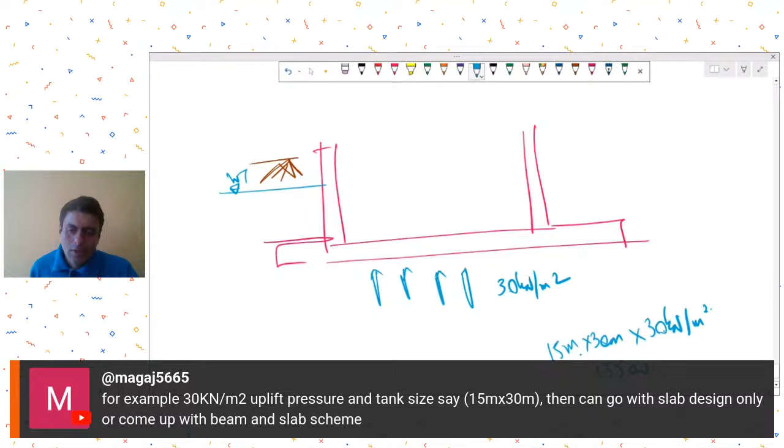Okay, so how much is the answer? 900 into 15. So this much kilonewton is your uplift pressure. So first you have to have some system which can take this 13,500 kilonewtons of pressure, maybe in tank empty condition. So just try to counteract it by having this soil fill. Okay, that is number one.

Then if that is satisfied, first the equilibrium has to be satisfied. If the equilibrium is satisfied, then for this uplift pressure you will have to design the raft. So now in raft you can use any system. You can use thick slab system, but then it will require very large thickness. So you can do a beam slab system for the raft.

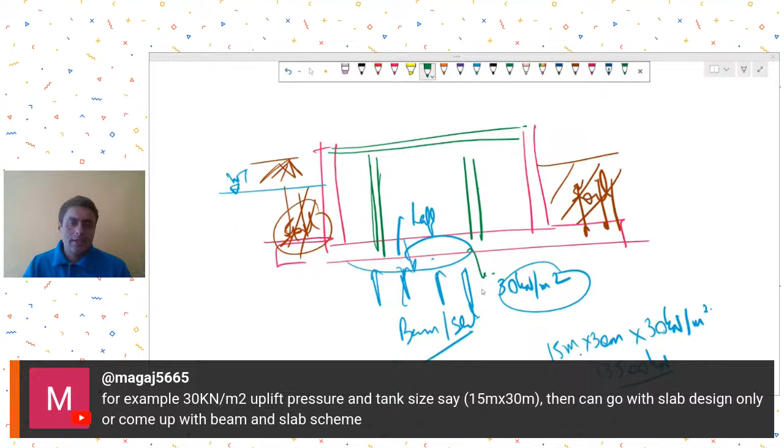If your slab spans are too high, I'll suggest you to introduce some internal columns so that those columns act as support for your raft, thereby reducing the spans of your raft. Okay, so that's what you can think of. So first point is to manage the equilibrium and then think about designing the raft for this pressure.

Okay, Mr. Intigab is asking any course where you have covered gravity column design. I think in the flat slab systems course that we have conducted, we have discussed this case of gravity columns.

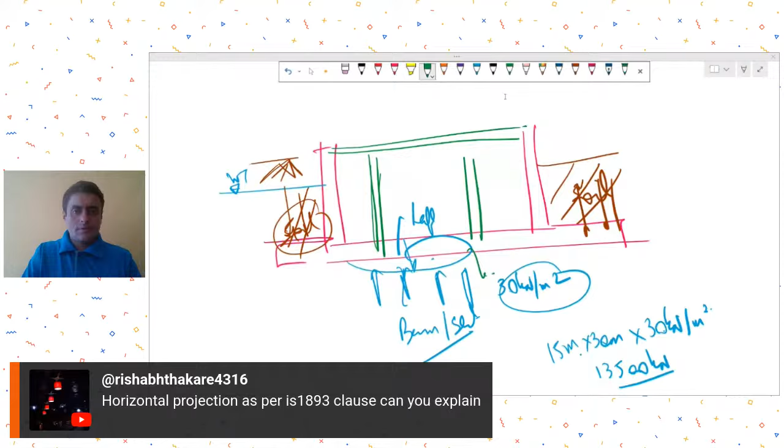Okay, Mr. Rishabh is asking horizontal projection as per IS 1893 clause. Can you explain? Which is this clause, horizontal projections? I don't know. Which clause you are talking about? That five times for horizontal cantilevers, five times the vertical earthquake. Is that the clause you are asking? I'm not sure which is this horizontal projection clause. Let me see. Horizontal projections. Acceleration for cantilevers. Yeah, I think that clause says five times the vertical earthquake force we have to apply. Five times AV or something like this. Is that what you're asking?

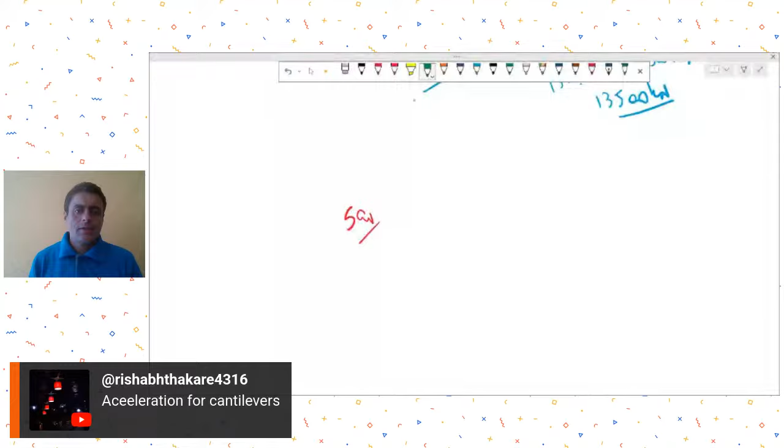So in that case, you may have to first calculate this vertical earthquake, and I think the vertical earthquake acceleration coefficient is two-thirds of horizontal acceleration coefficient. Then you will have to define it in ETABS maybe. For that definition, you can go to some good videos on YouTube. If not, it's very simple.

For large horizontal projections, you calculate the weight of this horizontal projection, and you will have the AV. So just do AV into W. That will give you the vertical force, and just do five times of this. I think this is what your code asks you to do. So even manually, if you don't want to do it on ETABS or STAAD, just calculate the weight of that projection, calculate five times AV, multiply it by the weight, and design your cantilever for that force.

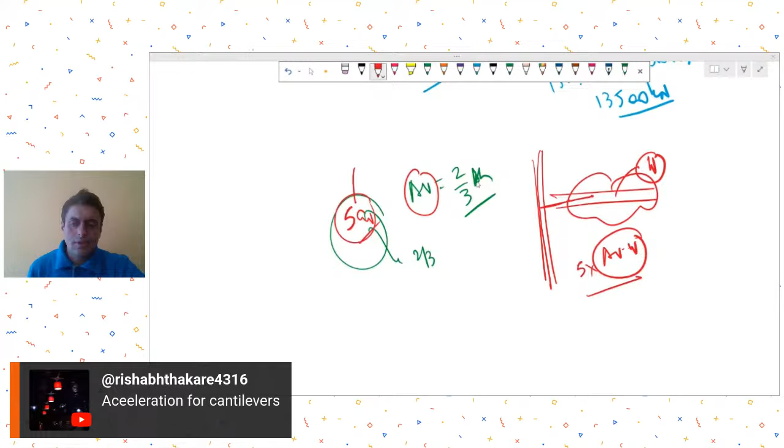Or you can define the vertical earthquake in ETABS and then apply it to your system. I think it will then take care of the projection.

Mr. Pratish Avasthi is asking, please describe the criteria. I just answered, Mr. Pratish. I think you were not there. I answered this query a little while ago. Just go back in the video and have a look.